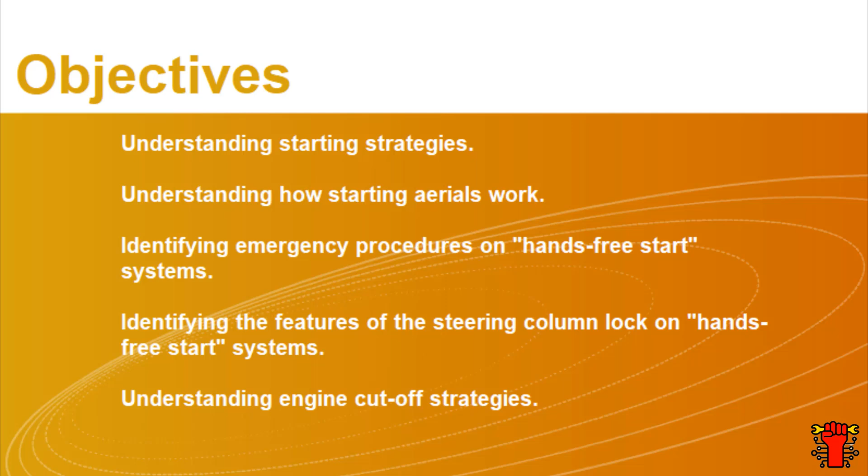We will deal with the following objectives in this lesson. Understanding starting strategies, understanding how starting aerials work, identifying emergency procedures on hands-free start systems, identifying the features of the steering column lock on hands-free start systems, understanding engine cut-off strategies, identifying the supply sequence procedures.

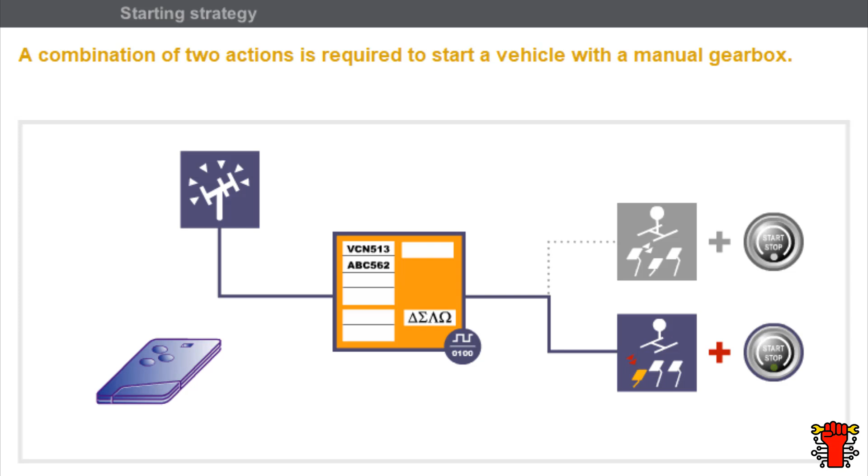Two actions must be combined to start the vehicle when the card is in the receiver aerial zone. If the vehicle is in neutral, press the brake pedal and the start-stop button. If a gear is engaged, depress the clutch pedal and press the start-stop button. On a vehicle with automatic transmission, set the lever to park or neutral and press the start-stop button.

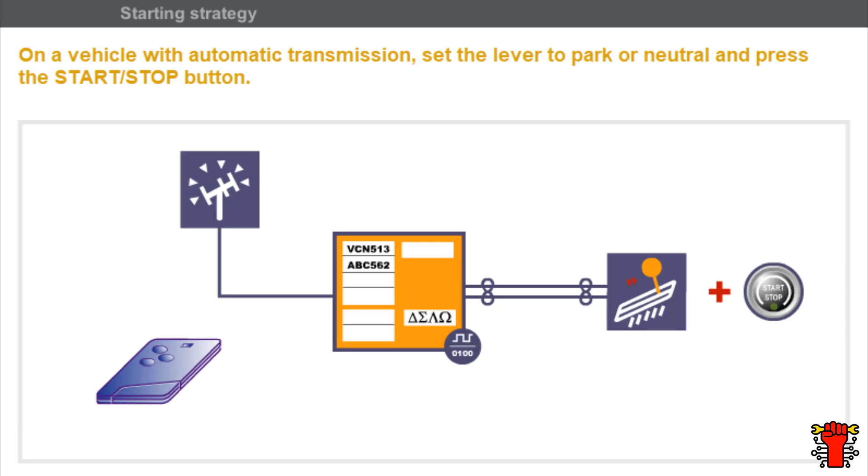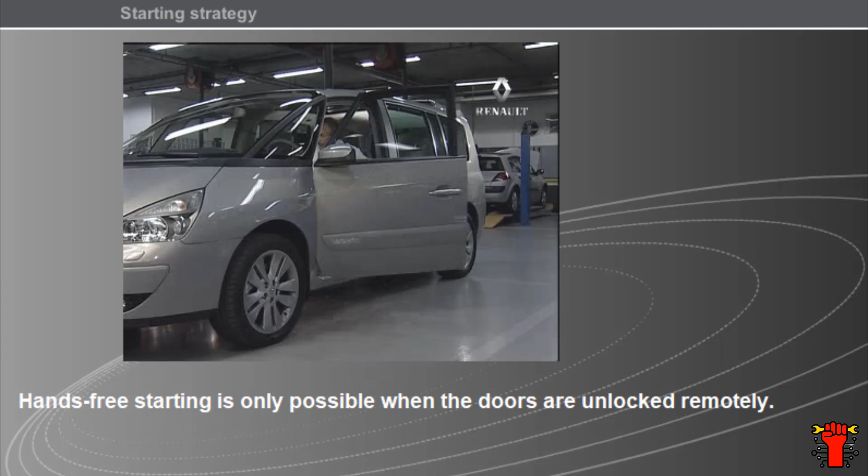Hands-free starting is only possible when the doors are unlocked remotely, either by hands-free unlocking or unlocking using the Renault card. In this section, we have looked at the following points. A combination of two actions is required to start a vehicle with a manual gearbox. On a vehicle with automatic transmission, set the lever to park or neutral and press the start-stop button. Hands-free starting is only possible when the doors have been unlocked remotely.

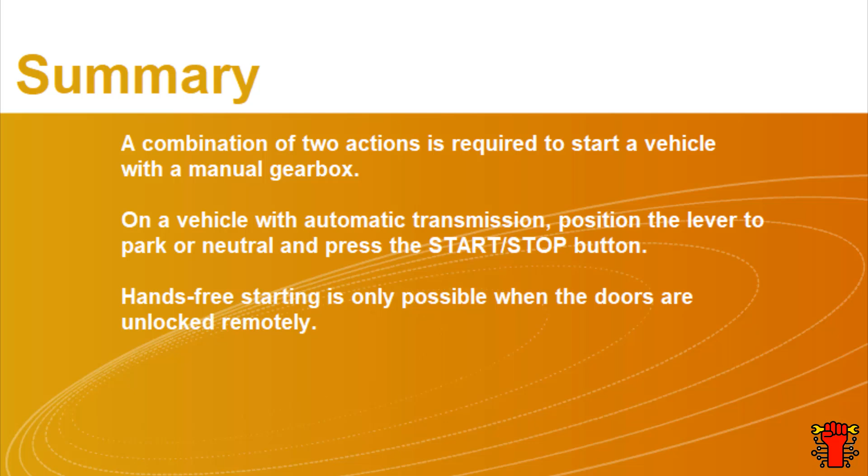When the start-stop button is pressed, the UCH generates a radio frequency signal via the starting aerials. If the card recognizes its UCH, it responds to the challenge to the receiver aerial. If the UCH recognizes the card and the response is correct, the UCH moves on to the next Immobiliser stage. The aerials stop transmitting as soon as the card is identified.

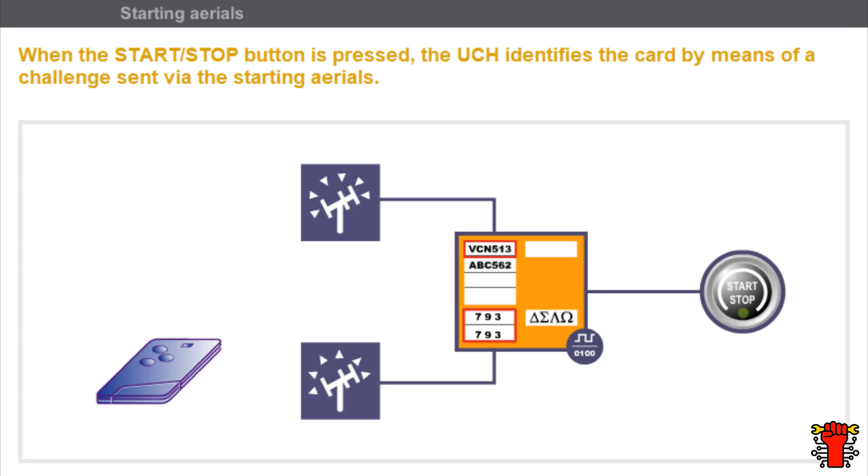Depending on the vehicle model, there are two possible configurations for starting aerials. In the first case, the card reader is connected to the UCH. A starting aerial connected to the UCH transmits a signal to the Renault card. The receiver aerial is incorporated in the card reader. In the second case, three starting aerials, connected directly and independently to the UCH, transmit a signal to the Renault card. The receiver aerial is incorporated in the UCH.

In this section, we have looked at the following points. When the Start-Stop button is pressed, the UCH identifies the card by means of a challenge sent via the starting aerials. Depending on the vehicle model, there are two possible configurations for starting aerials.

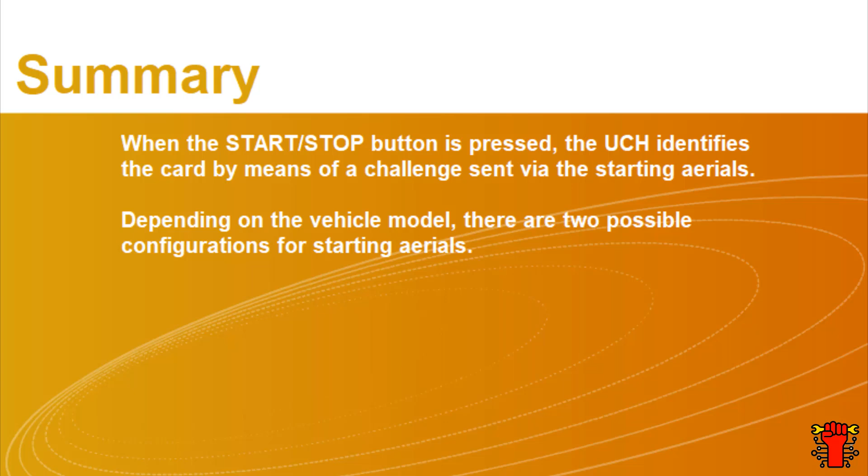If the hands-free start card is not recognized, the UCH consults the card reader. The card reader flashes. The card reader does not have a switch or a card lock. An emergency solution is a return to transponder mode. Just enter the card in the card reader. The card reader must be used if the doors and boot were unlocked manually or if the card battery is discharged.

In this section, we have looked at the following points. If the hands-free start card is not recognized, the UCH consults the card reader. The card reader flashes. In some cases, the card reader must be used.

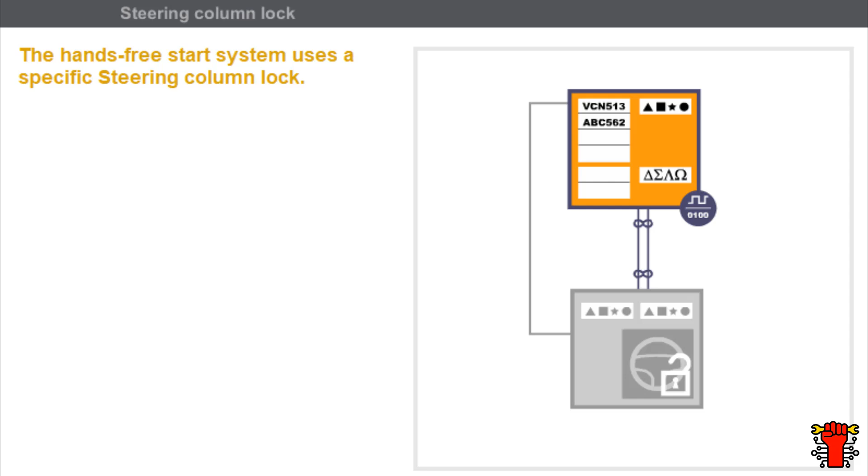The hands-free start system uses a specific steering column lock. A Hall effect sensor incorporated in the steering column lock informs the UCH when the column is unlocked. The UCH no longer supplies the steering column lock once the steering column has been unlocked. The locking and unlocking signal is transmitted via the multiplex network and a wire connection. The signal is repeated for security reasons.

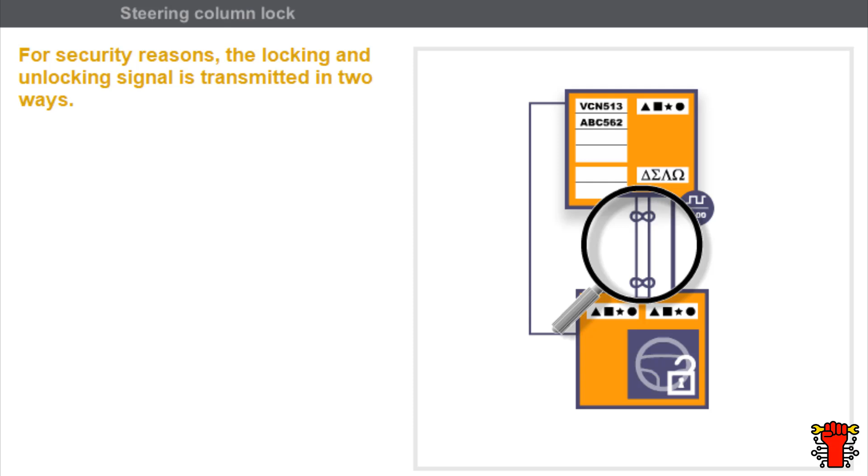In this section, we have looked at the following points. The hands-free start system uses a specific steering column lock. For security reasons, the locking and unlocking signal is transmitted in two ways.

When the vehicle is stopped, the engine is turned off by pressing the Start-Stop button. When the engine is stopped, the ignition is switched off and the plus accessories feed maintained. The steering column lock remains unlocked. The driver's door needs to be opened or the doors and boot locked to cut off the plus accessories feed and lock the steering column.

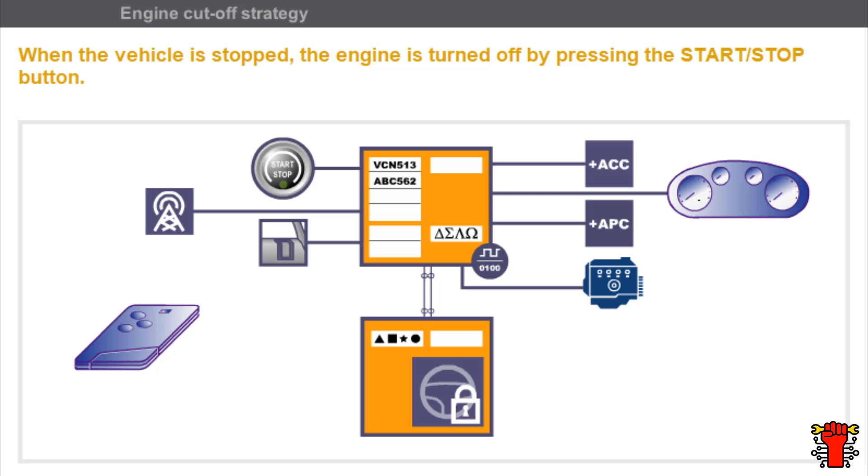On some hands-free start models, when the engine is stopped, the UCH authenticates the card in the same way as when starting. If the request to stop the engine is made when the card is outside the covered zone, a message appears on the instrument panel and a beep sounds. The engine does not stop. In this situation, the engine is turned off by pressing the Start-Stop button twice.

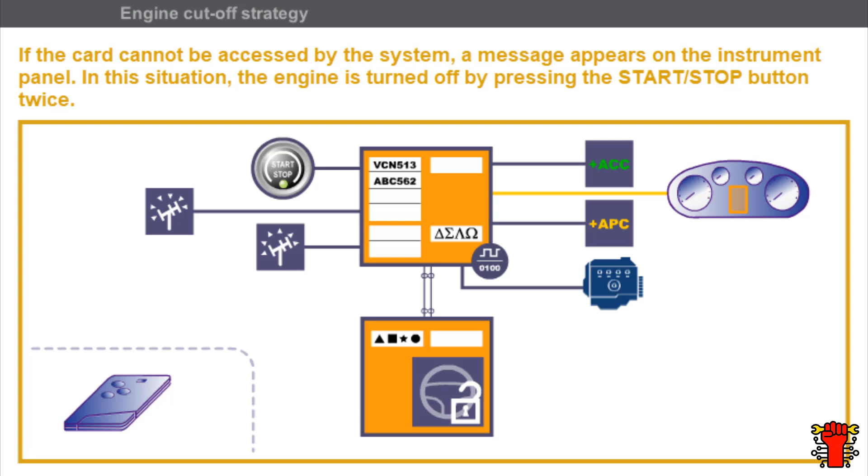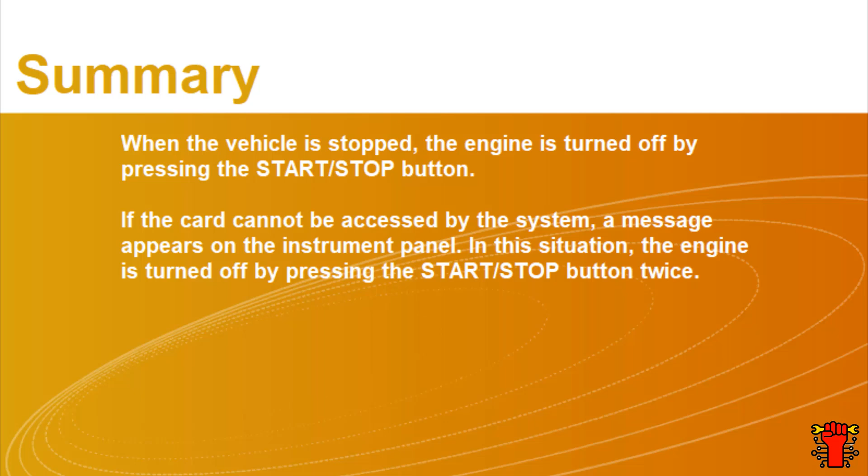In this section, we have looked at the following points. When the vehicle is stopped, the engine is turned off by pressing the Start-Stop button. If the card cannot be accessed by the system, a message appears on the instrument panel. In this situation, the engine is turned off by pressing the Start-Stop button twice.

If the starting conditions are not fulfilled, the Plus Accessories feed can be supplied without authenticating the card by pressing the Start-Stop button. A challenge is issued when the Start-Stop button is pressed again. If the card is identified, the steering column is unlocked and the ignition switched on. By pressing it a third time, the steering column is locked and the supplies cut off.

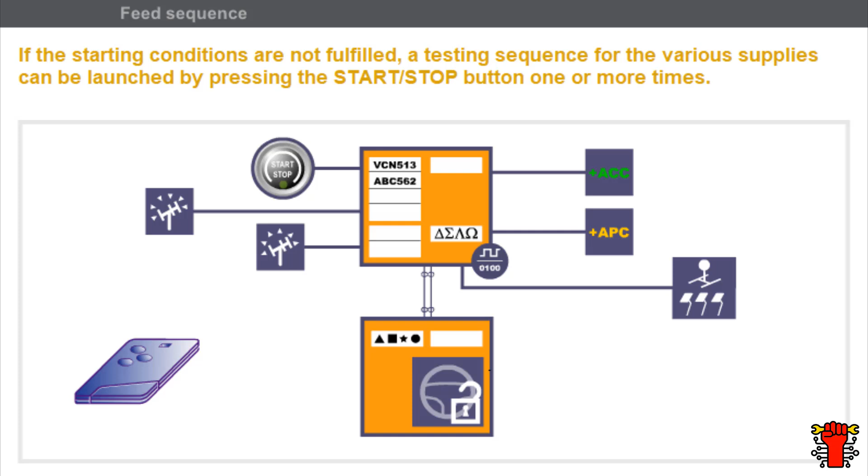If the starting conditions are not fulfilled on some recent models, the Plus Accessories feed can be supplied with card authentication by pressing the Start-Stop button. The feeds are cut off by pressing it again. For after-sales requirements, when the card is within the coverage zone, the after-ignition feed is obtained by pressing the Start-Stop button for at least 5 seconds.

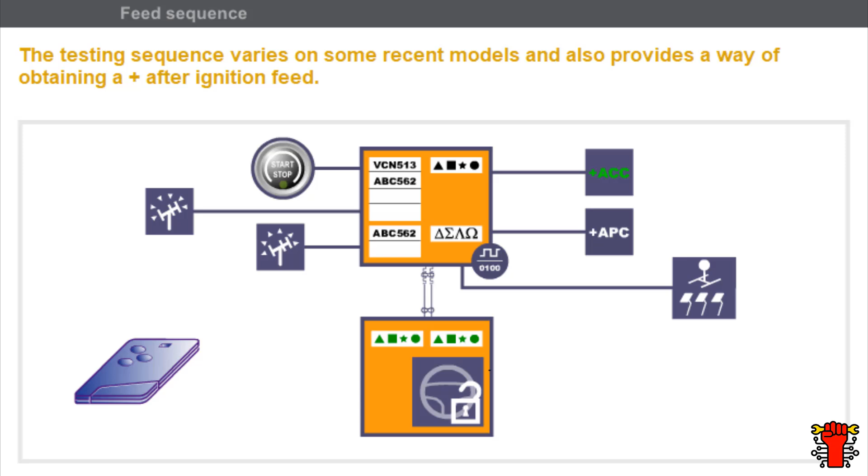In this section, we have looked at the following points. If the starting conditions are not fulfilled, a testing sequence for the various supplies can be launched by pressing the Start-Stop button one or several times. The testing sequence varies on some recent models and also provides a way of obtaining a Plus after ignition feed.